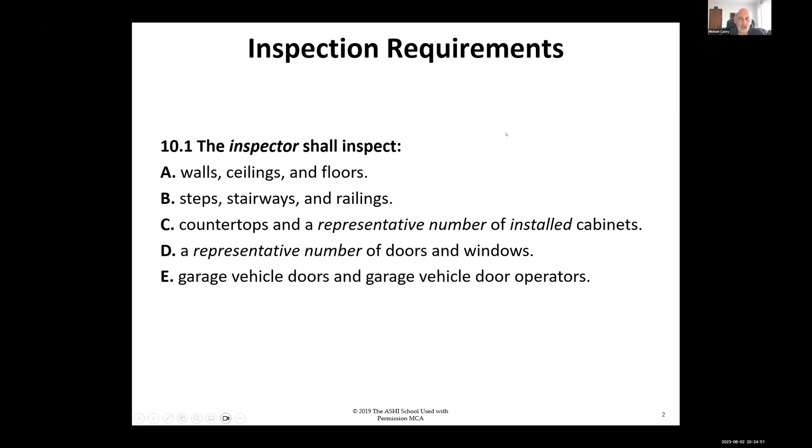So then, of course, we have the exceptions, things that we are not required to inspect. But what are we looking for? Well, basically things that aren't functioning properly, are significantly deficient, which could be stairways. And then we have this item 3, which always kind of scares me, where we have to look for things that are unsafe. So we almost have to kind of predict, well, what could happen here? What could happen on these stairs?

How could people fall? Well, we want to look close for conformity with minimum standards on stairways. And it's kind of tough because many of us do really old houses. I grew up in a real old house in Connecticut, built around 1850, and it had some really steep stairs,

and they certainly did not have rise and run like you would see required in modern homes. Then, of course, near end of service life, stairways can be at the end of their service life, especially bulkhead stairs in basements. You want to look at those close because many times they're pretty well rotted out, and you find out that they're defective when the plumber stands on it with a water heater on a hand truck. So look closely at those.

Then, of course, we have to describe required systems or components. All right, so let's talk about interior stairs and landings. Now, I know I've specified this as interior stairs and landings, and that's more to limit this discussion because we only have maybe a little bit less than an hour.

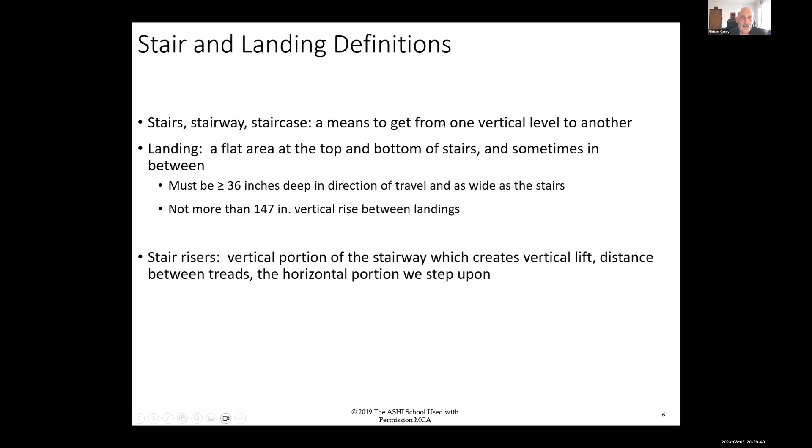Stair risers are the vertical portion of the stairway that creates the lift, and it's the distance between the treads, or the horizontal portion that we step on—that's the tread. So the rise is the vertical piece in between. We'll get to what all those do here in just a second.

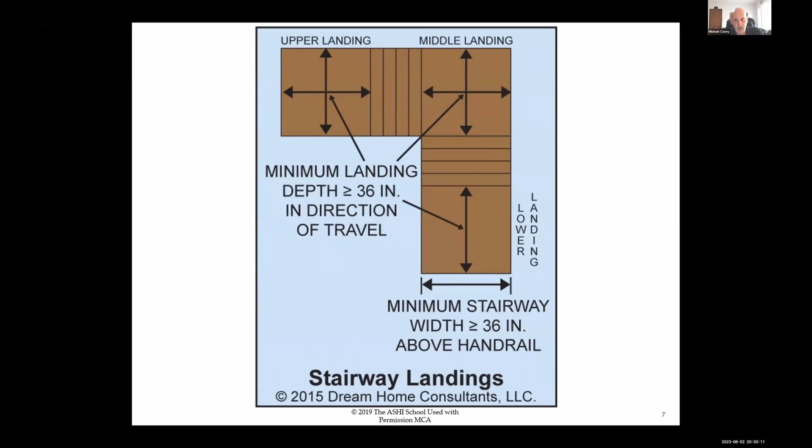So landings should be 36 inches wide and 36 inches deep. Pretty much that's going to be the standard. Now, there are some exceptions—you can have some angles in them, which we'll look at a picture of here in just a couple of minutes. What really matters is the width at the travel location, or the area of travel. We'll see what that is here in just a second.

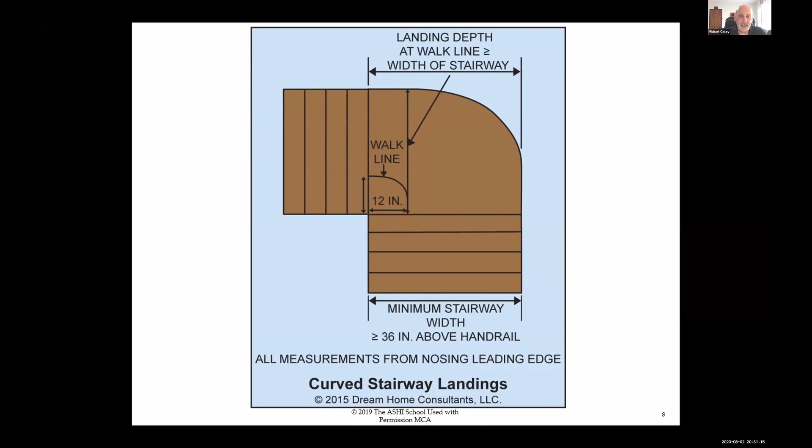So a flight of stairs, if you have a landing, is the stairs between the 2 landings—you may have 2 flights of stairs if there's an intermediate landing. The treads, or the steps, are the horizontal part that we stand on. Winders are going to be narrower at one end than the other, and usually they're used to change direction of the stairway. There's some minimum depths on those we'll look at in a second.

Now, regarding measuring tread depth, in the definition in the IBC, the tread depth is measured horizontally—the depth where you put your foot—between the vertical planes of the foremost projection of the adjacent treads. That means from the end of the nosing, vertically down, and at a right angle to the tread's leading edge. So the depth of the tread, if you've got a 1-inch nosing, that tread needs to be basically 11 inches if you measure it all the way to the piece of wood on the back at the riser, because it should be measured from the nosing. We'll show you some pictures of this in just a second.

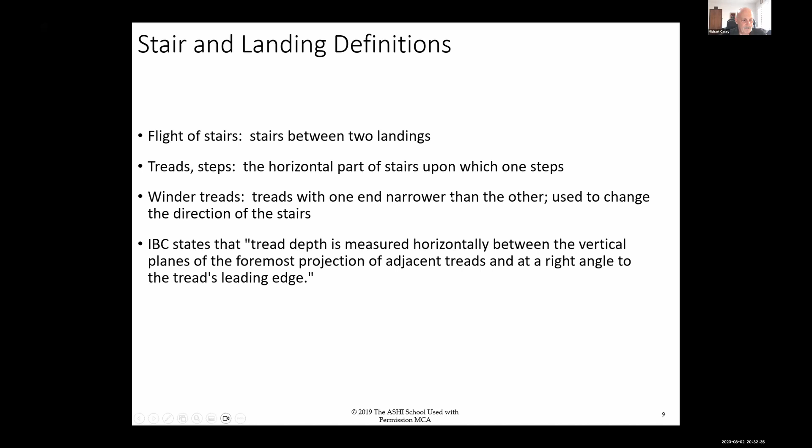And most of the time where we see them screwed up is going to be at the top one or the first one, because people change floor coverings, and that's what screws up the risers. Other times they're just built bad and they're all different, but usually what I see in the field is we've got a problem at the first riser or at the top riser, or both of them, because floor coverings were changed. The finished height of the floor is now different, which caused a problem there.

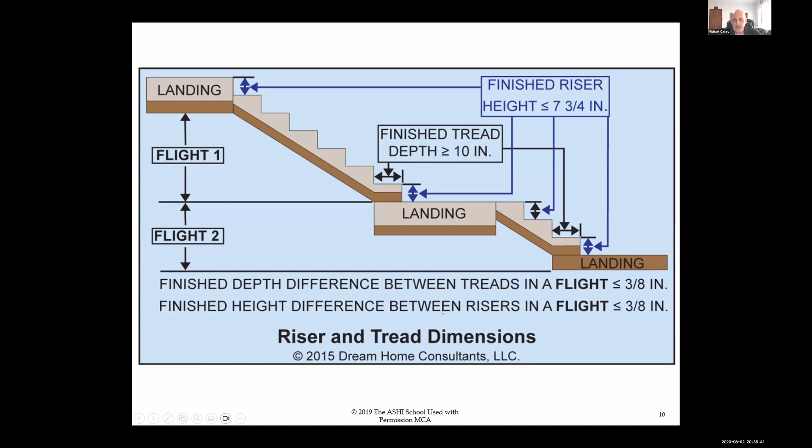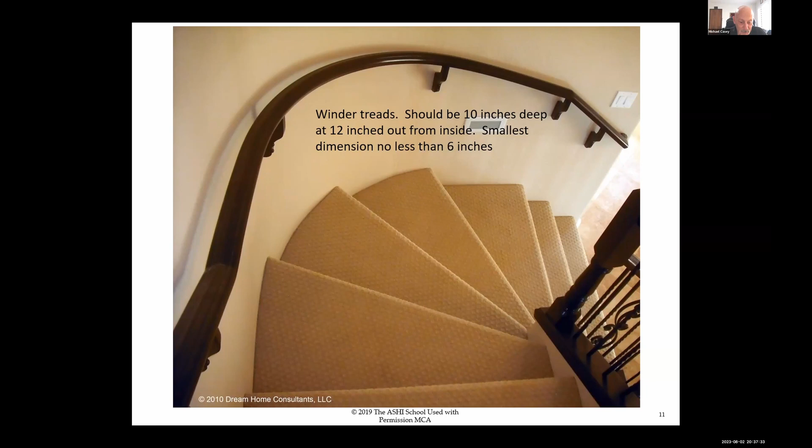Okay, so the risers are the vertical part of the stairs, and they can be open or closed. Now, we all know that when they're open, there shouldn't be any opening more than 4 inches when you get to be 30 inches or more above the floor below. So open risers, if you see them on older houses where they're open, they could be sometimes 6, 7 inches open. Those are a potential hazard, especially to children and pets. So we recommend that they be closed.

And then the nosing is the projection of a tread beyond the closed riser. Typically, you don't have a nosing when they're open riser treads. And then the stringers, those are the components that support the treads. So I'm sure everybody on this call knows what they are, but I just want to make sure. We'll just go through them quick.

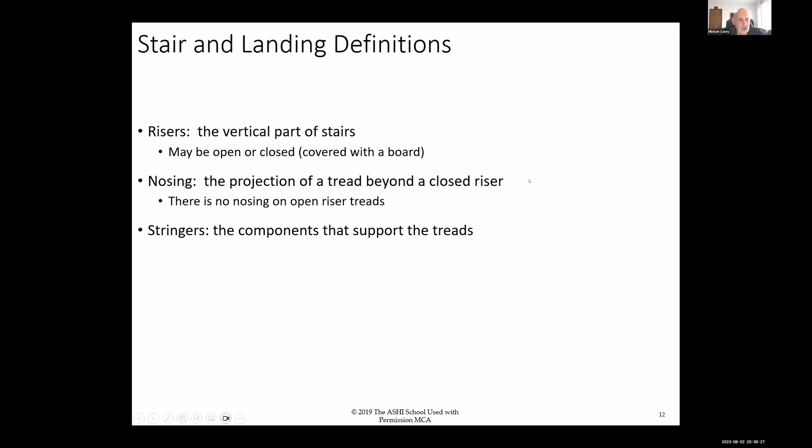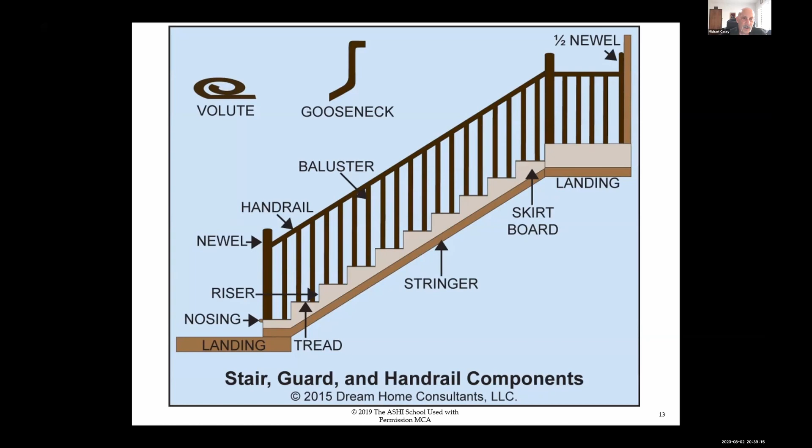Now, a lot of things have changed over time, especially headroom in stairs. Gosh, it used to be 6'4", then it went to 6'6". Now it's 6'8". Back when we used the uniform building code, your treads could be 9 inches with 8-inch rise. Of course, back pre about 1915 or 1920, there wasn't any code, and people just built whatever. And then we used to be able to have 30-inch wide stairways. Imagine carrying furniture up. So a lot of things change over time.

And of course, failure to comply with modern standards isn't a defect. However, I still note what the modern standard is, and I recommend upgrading because people fall on stairs. And you know what? If I don't say anything about it being an old stairway and not compliant with modern standards, I'm probably going to have a bit of a problem. So I always recommend upgrading to modern, safer standards. I doubt any client has ever fixed it, but I told them. So that's the main thing, I tell them what's up in the report.

So maximum riser height, 7 3/4. Remember, your minimum is 4. And taller risers, you're going to find a lot in older homes. And we want to make sure that there's no openings larger than 4 inches in open risers, anything a kid could fall through. And then tread depth should be at least 10 inches, and we need to measure that from the adjacent tread leading edge, which is the nosing. And narrow treads can be a hazard because you don't get a full area to plant your foot on.

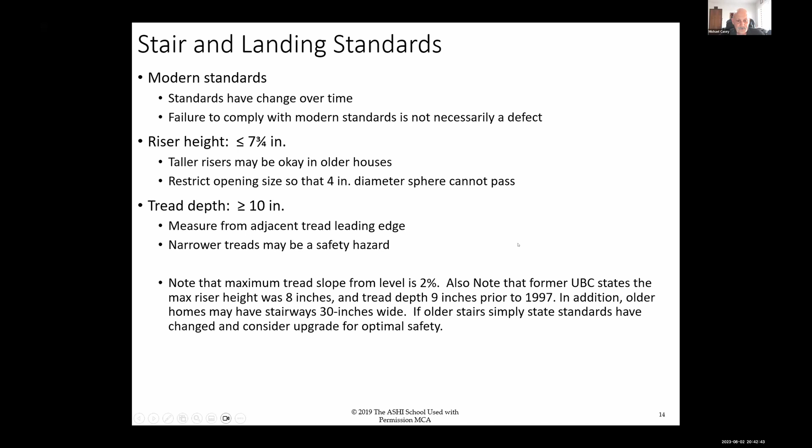Okay. And then winders, we kind of touched on this before. You've got to make at least 10 inches deep in the tread, at least 12 inches into the stairway. And then that minimum 6 inches depth anywhere. So at the small end it has to be minimum 6 inches of tread, not 3, not 4. It needs to be 6 inches. And the 3/8 differential, we talked about that.

And then nosings. I see a lot of nosings that are totally screwed up. So it should be 3/4 of an inch to 1 1/4 inches. That's it in a flight of stairs. So that's what the nosing can be. I looked at one recently, the nosing was 2 1/4 inches. And the treads effectively, because of that, were about, I think, 9 and 9.5 inches or so. So it really screwed up the stairs.

And then the difference in nosing depth. How many of you have ever measured this? The difference in nosing depth should not be greater than 3/8 of an inch between the top and bottom landings, meaning in a stairway. So that 3/8 applies also to the nosings. And you'd be surprised if you measure the nosing, the difference that you can find sometimes, especially if people have changed the floor covering.

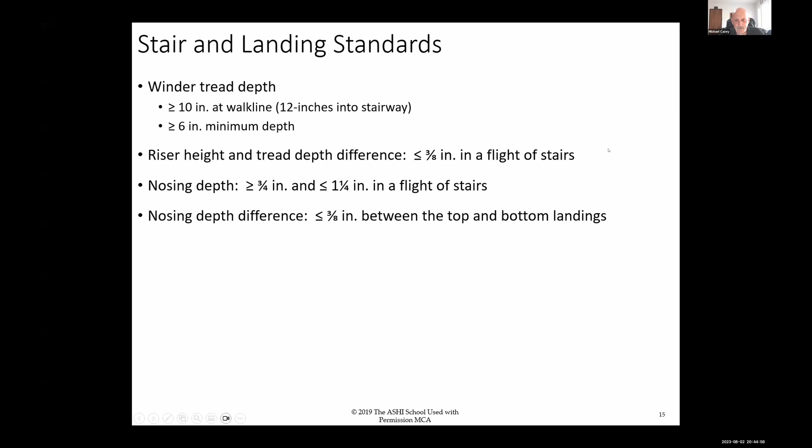Those are hazardous. And I've seen those quite a bit where there's laminate flooring installed at the stair treads, and whatever they cover the nosing with is like an L type piece, but it's got a bit of a rise to it, and it's very unusual because it changes the profile and it causes people to trip. So be careful when you see those.

Okay, so winder treads, let's just make sure we've got this clarified. At the small end here, minimum 6 inches, and you need to make tread depth of 10 by the time you get 12 inches in, right here. So that's it. And I think there's pictures. Yeah, there's pictures in the code check book here too. So make sure you have that.

And if you need to refresh your memory, sometimes the stairway looks kind of odd and you have to refresh your memory. So go back out to the inspection wagon and take a look at your code check book or whatever reference you use. Because you don't have to try and remember all this stuff, especially stairways. It's a heck of a lot of numbers to remember.

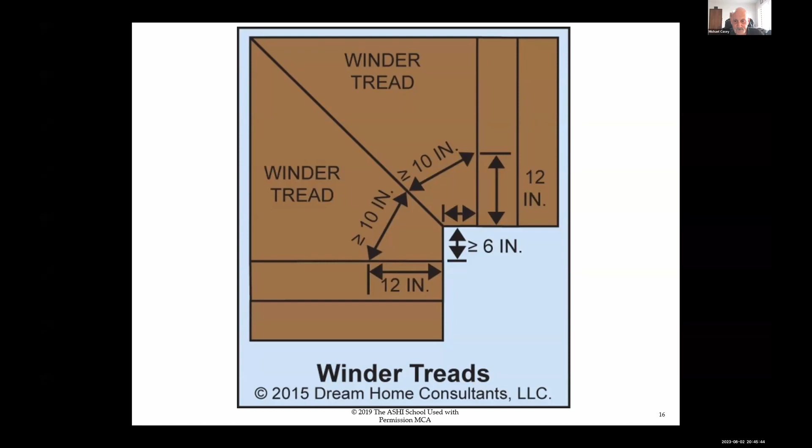Okay, so headroom, modern requirement, 6'8". Now, it used to be 6'6", then it was 6'4" before that. I see a lot of stairways, especially those ones on the capes where you're going up to the attic, that finished room that's upstairs, and you have to bend your head like this to get up there. Those are obviously less than 6 feet. So report that. It's incorrect.

And what are you gonna do? How are you gonna fix it? You're gonna poke a hole, do a dormer in the roof to give you enough headroom on the stairway. So I guess you could. I mean, that's one way to get around it and fix it. So I just note the deficiency. Usually it's pretty obvious, but even though it's obvious, I'm still gonna note it and recommend that people use caution when using the stairway. I mean, what else? Recommend correction for optimal safety. And what else can you do?

Okay, headroom for spiral stairs, a little bit different. 78 inches, so 6'6" for spiral stairs. And we'll look at some examples of those in just a minute. And then, of course, minimum stairway width is 36 inches, and this is above the handrail, by the way.

I think it's 27 below, but I could be wrong. I have to check that. Stairway lighting is important. I'm working currently on a claim where somebody fell on a stair because of, they're blaming lack of lighting, and actually it's the truth. There wasn't any lighting, or it wasn't appropriate.

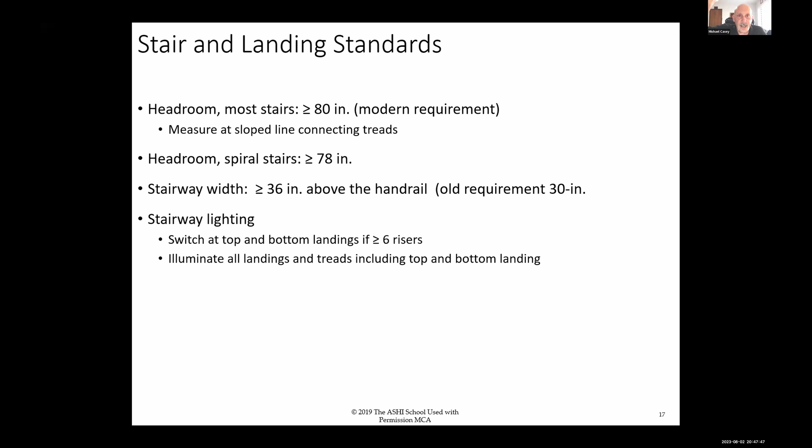So there should be a switch at the top and bottom landings if there's 6 or more risers. And it's really hard to tell if the lighting is correct when we're doing an inspection. Usually it's during the day, at least the ones I do. So the lighting should illuminate all the landings and all the treads. You should be able to see. So I just look up and make sure there's a light above the stairs or close by that's going to illuminate the treads.

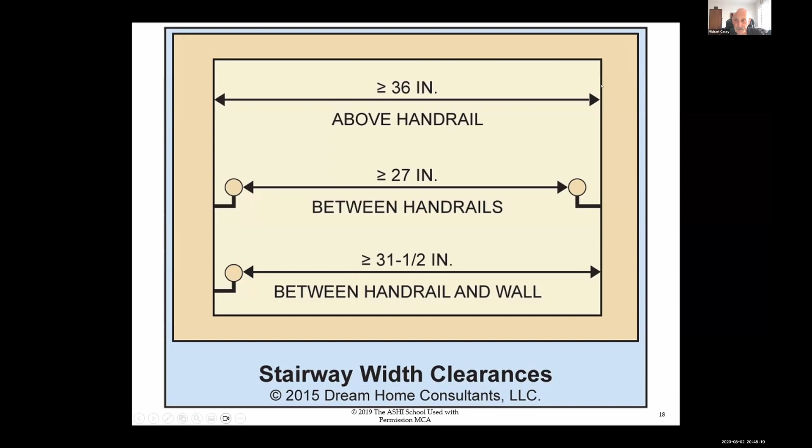Okay, so here's our minimum distances. The width of the stairway, 36 inches above the handrail. It's 27 inches between handrails if there's 2 of them, and then 31.5 inches between the handrail and a wall. So these are our distances. So a lot of numbers to remember. So that's why it's good to have kind of a cheat sheet or code check or some kind of book you can use to take a look at it, because it is quite a few numbers.

Okay, stair stringers, when you can see them, because a lot of times we can't see them because they're covered with drywall, which is what they should be covered with if there's storage space under stairways. It needs to be covered with drywall. So the stringers, the throat depth should be at least 5 inches or so, and that's a recommended number. It's not a required number. If I see anything that's 3 or 4 inches or less, that's definitely reportable because that's a lot of the meat gone from the material.

And then dimensional lumber stringers should be secured. It needs to be supported at the top and the bottom. It needs to be something holding it in place. So there's not really any prescriptive rules, but the plumb cut should be bearing fully, not a half an inch. I'll show you a picture of that. And the seat cut should be bearing, and it should be bearing on the long part, which is the heel, not the little toe part. So the deck stairway information actually could tell you a lot about these. It's pretty much the same.

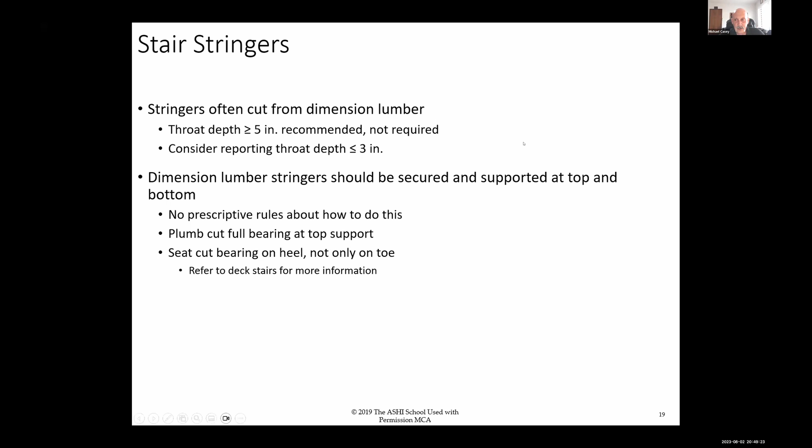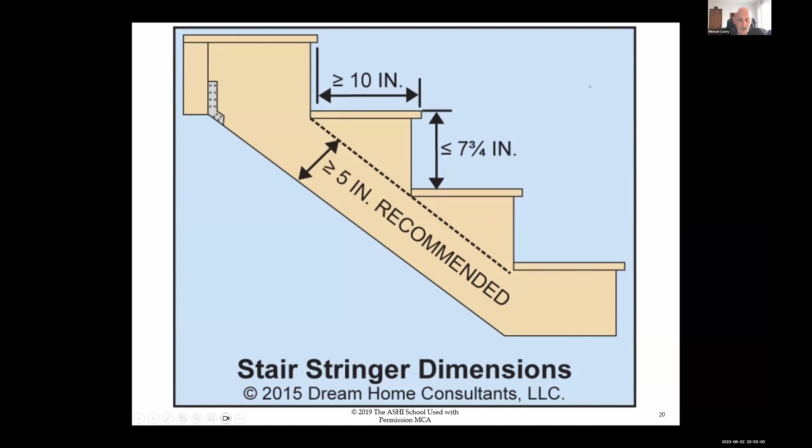So 5 inches here should be minimum. And remember, here's a good diagram showing us how to measure your tread depth. So we should be measuring from a vertical line from the end of the nosing down. That's our tread depth here. See right here? That should be our 10-inch minimum tread depth. So a lot of times they're wrong. A lot of times they're 10 inches full here, but the nosing is 1.5 inches. So that would be incorrect. That's not a proper way to measure your tread.

Now this one we can actually see the plumb cut at the top of the stairs, and you can see it's just kind of hanging there. There's a couple of shims installed, and I can't tell what's holding this up because there's material in the way, but it doesn't look good to me. So I'm going to recommend additional support, maybe some hangers, something here to hold this stairway. This is the top of the stairway, so it doesn't look like there's much holding it in place.

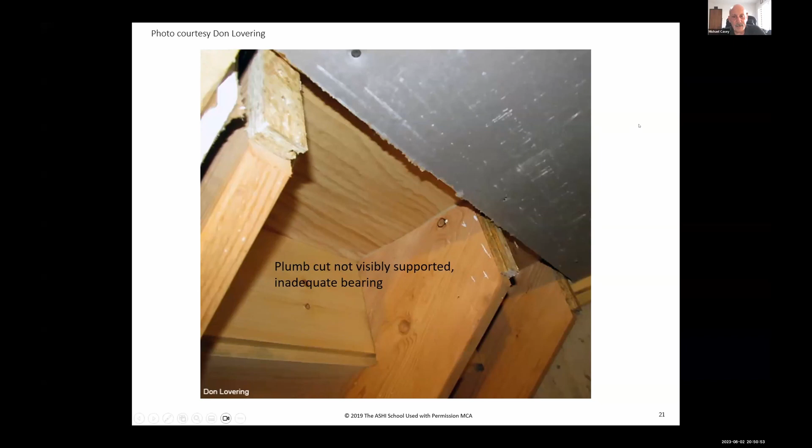I think stairways in newer homes are usually much better because typically the framers on site don't build stairways anymore. They order them from a stair company. That's all they do is build stairs, and they're pretty good at it. So most of the ones we see that are built by these specialty companies, they come out and measure and they build them and then drop them at the site. Those are usually pretty good, but they can screw them up too by not supporting them properly.

Okay, so spiral stairs. These are interesting. I typically see them maybe for a mezzanine, or I've seen them used to access a deck. So spiral stairs are kind of the ones that are not a whole lot of room and feel kind of dangerous going up and down. And they have their own rules.

Riser height, 9.5 inches is maximum. That's quite a tall riser. Tread depth, minimum 6 3/4 inches at the walk line, that's 12 inches from the small end. So really totally different. And the width, at least 26 inches at and below the handrail. These things are just their own total animal, and they can get screwed up too. Usually they're okay when you buy ones custom made by stair companies, a lot of times made out of ornamental iron. But I see people try to site build these things, and usually they'll screw them up.

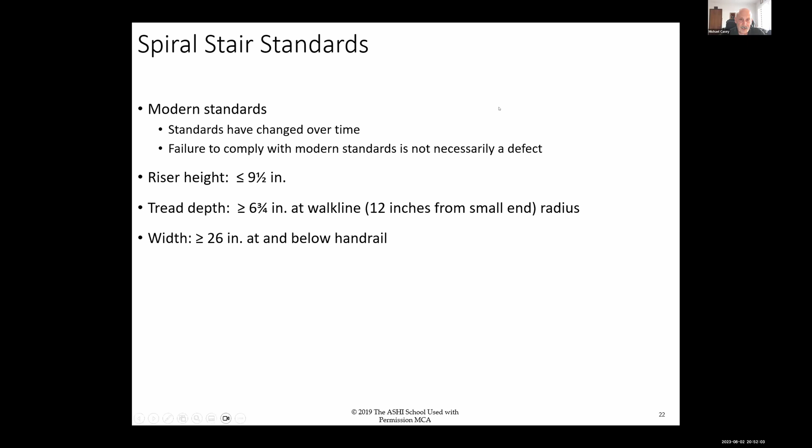Now this is a claim I worked on some years ago, 2019, where somebody fell. This is a spiral stairway that was site built. Remember, we're supposed to have 6 3/4 inches at the walk line, 12 inches from the inside corner. And we're at about 5.5 or so here, maybe a little more. We're definitely shy, a good inch shy of 6 3/4. Somebody fell down these stairs, and eventually it got settled, somebody got paid off. I was one of the experts, maybe for the insurance company or something, I don't remember. But I went and measured it, and I told them, it's wrong.

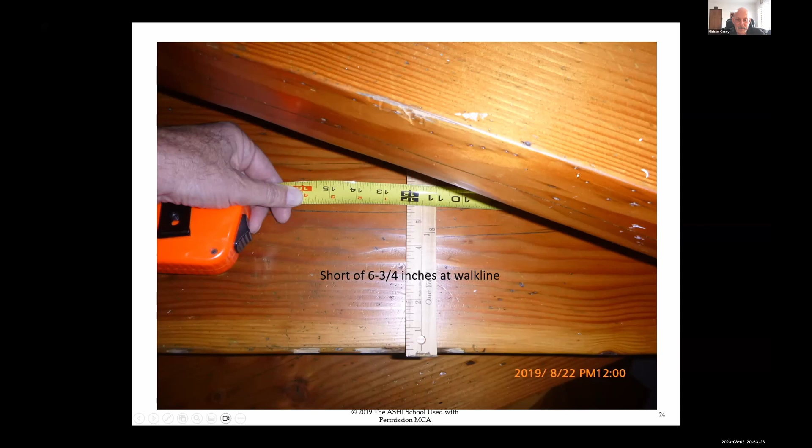So what else are you going to tell them? You've got to tell them the truth. So it was incorrectly built. We're going to see quite a few stairs with risers that are taller than current standard. It could be, if it's an older home, that the standards were different back then. If it's something newer, it could have been built wrong. But regardless, I'm pretty much going to report it. If it's an older house, I'll say the riser height is more than what we'd see in modern homes and consider upgrading for optimal safety. I know people out there are groaning about that, but that's what I do, just to make sure, give them the option. You could upgrade it, which basically means rebuild the stairs.

So I told you, tread depth smaller. We used to have 9-inch treads with the UBC, and I think the standard building code too, so 9-inch was pretty common. Now it's 10 inches, measured from the nosing. Usually it's because they're older stairs, or it could be if they're newer, later than 1997, which is when that code changed, then it could be something improperly built. So I recommend correction regardless, or consider upgrading, it's up to you as the inspector. But remember, it's stairways, people fall.

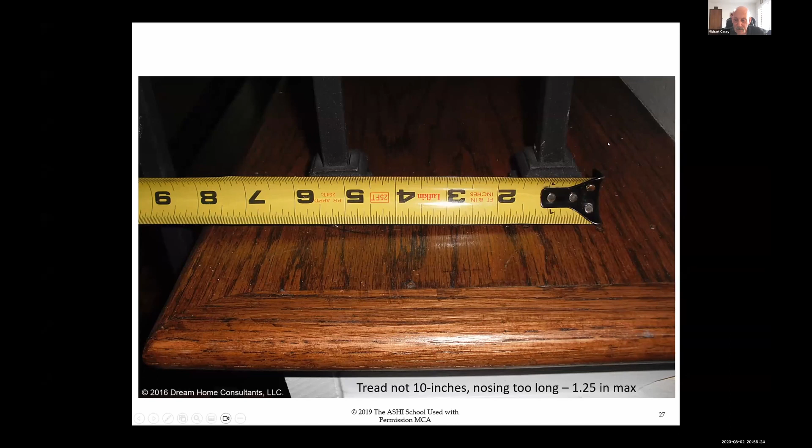And here it is. We're looking at a stairway where look at that nosing, it's hanging over about 2.5 inches or so, where 1.25 inches is the maximum overhang for a nosing. Remember, 3/4 inch to 1.25 inches. So this tread, if you measure from the nosing edge, you've only got about an 8-inch tread. It's incorrect, the tread should be at least 10 inches. The way to fix it is to reduce the nosing, the nosing is actually the problem, it's a defect because it's too long. This one, I think it might have been 2 3/4, way different than what it should have been. So we documented that it was incorrect and recommend correction. Are they going to do anything? Probably not, but we still want to tell them in the report.

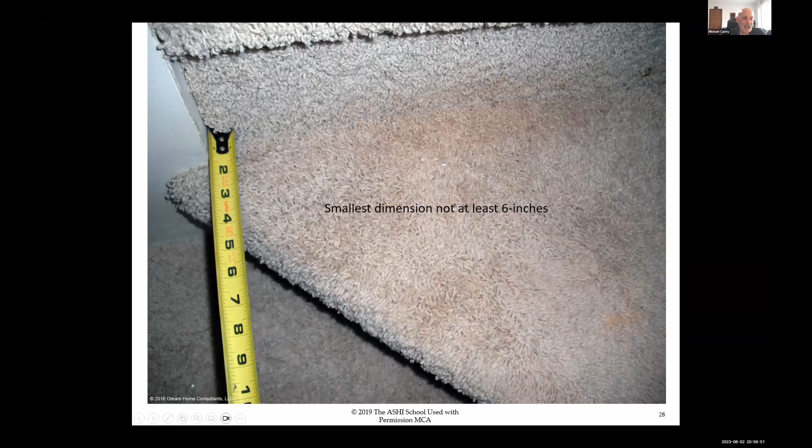Now here's a winder, and you can see we've got this small end here, should be what? 6 inches minimum, and this one is about 4. If we shove the end of the tape all the way into the carpet to get an accurate measurement, we got about 4 inches here. Of course, just about a point over here. So we're being nice, and we definitely don't have the 6 inches minimum at the end.

Now this one, nosings, that's important. The nosing should comply with standard. It's something that you can drag your foot on. It could make you trip up if the nosings are too long. If something has covered them, like that laminate flooring stuff where they put that cover over the nosing, that transition piece tends to be loose, and it's a different profile and height, and I find that it's pretty easy to catch my foot on that.

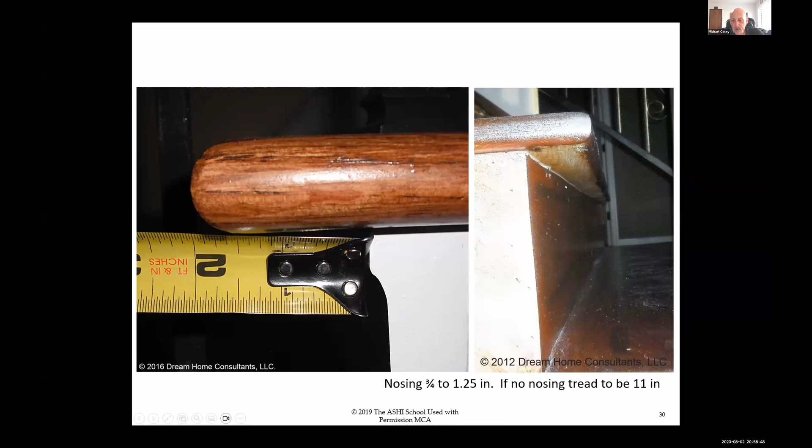So that's hazardous. There's a reason why we have these minimum and maximum measurements for nosing, because they've done testing, and we know how people get into a residence as you go up the stairs, and people fall when the measurements are different from what we're seeing here. So that's why it should be compliant.

So, we don't want to get blamed for people falling down the stairs. So if it's different than current standard, I'm going to note it because it's a potential trip hazard, and I'm going to recommend correction. So, we see a lot of stairs that are poorly built, and this includes, and you guys are going to see a lot of these, basement stairs. They're freaking awful. I've gone up and down a heck of a lot of them in older homes. Basement stairs, bulkhead stairs, people think that different rules apply.

Bulkhead stairs, gosh, I don't recall ever seeing them with a handrail. Going out the Bilco doors, there's no handrail, and there should be a handrail there. That's a stairway. The code doesn't differentiate because it's in the basement. I don't care where the stairway is. It should comply with these rules.

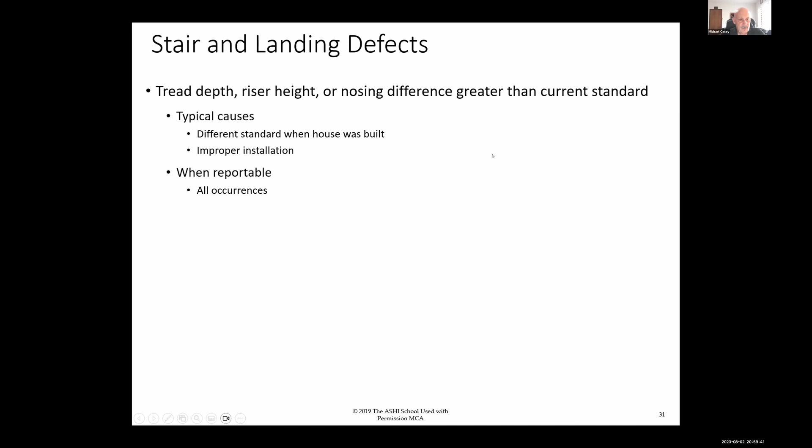And what happened was they changed the floor covering, and they changed it in every single apartment. There's like 60 of them, and they're all wrong. So they're probably never going to fix it. And the difference is a good inch in this first riser compared to the other one. So I didn't even need the tape measure to figure it out. Obviously, you can feel it. I could see it walking in the front door, the difference.

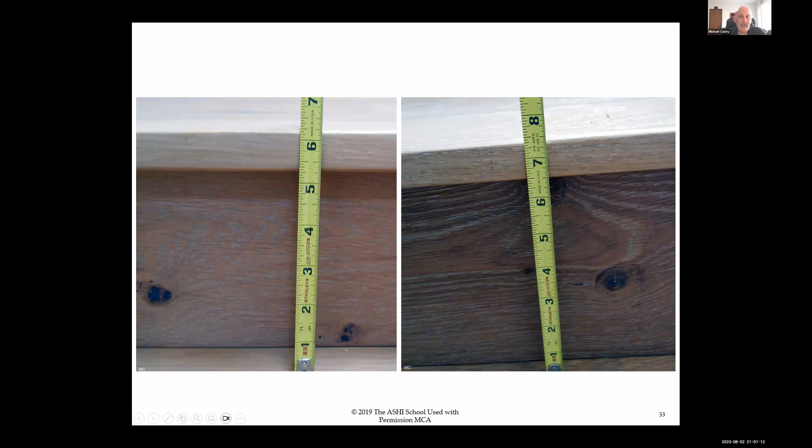So that's a trip hazard. And now they've created it in every single apartment in the whole project. So, unfortunately, it should be fixed. I'm going to recommend it. They're not going to do anything, but I'm going to tell them about it.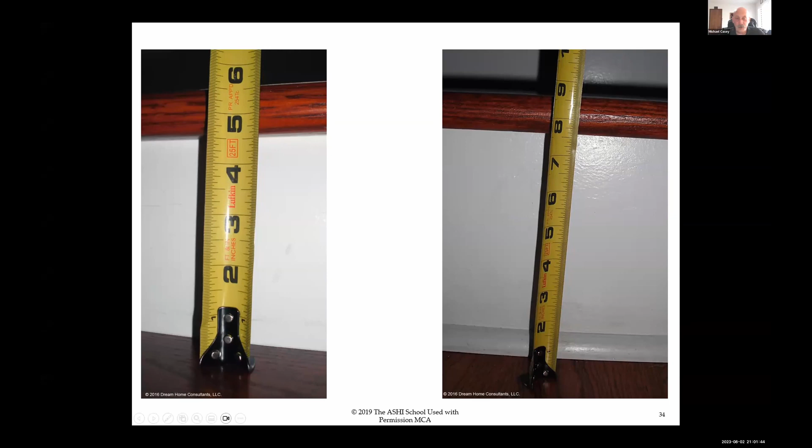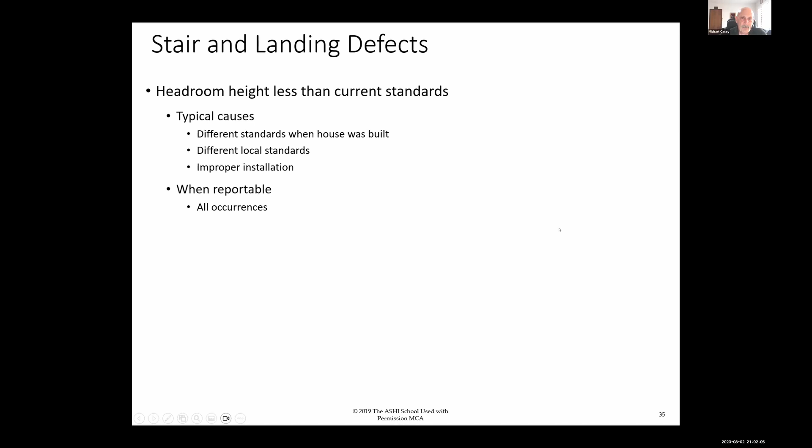Headroom, if it's less than 6'8", I'm certainly going to say something about it. Although if it's like 6'6", I'll just say it's less than what modern standards are. Caution in this area, that's about it. I probably won't recommend correction.

And this is how you measure it. It's an imaginary line that's kind of tangent to the nosing, or just take your tape measure and measure from the nosing up to the ceiling. Usually where it's going to be screwed up is right here or at the top of the stairs. Now, if you have to move your head to go up or down the stairs, obviously it's way lower than it should be.

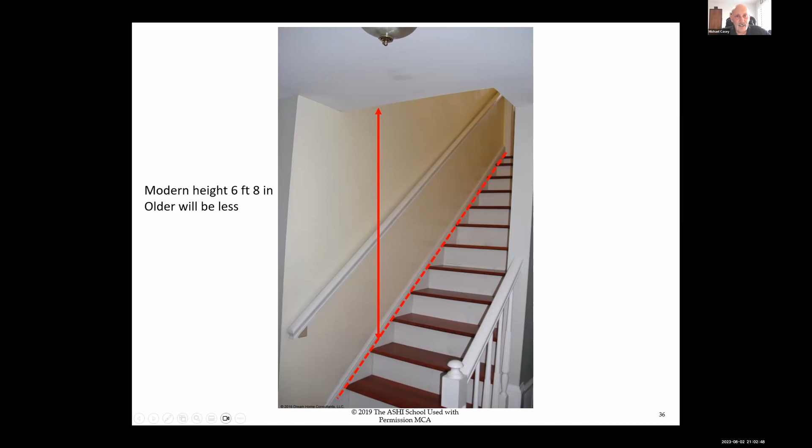I can't remember ceiling height ever being less than 6'4". So that's definitely way low if you have to move your head. And a lot of times that's at the basement stairs too. We have the sign there that says, or it's a picture of a duck. It's kind of funny, but still, you shouldn't have to hit your head going down in the basement stairs.

Okay, so width or landing depth less than current standard, once again I'm going to recommend that be corrected. Now, there's a different standard if it was a 30-inch wide stairway. If you're looking at a home that's 50 years old where it was a 30-inch stairway, obviously that doesn't have to be 36 inches. So I would just comment that the stairway appears to have been constructed under older standards that allowed the 30-inch width, and it could be problematic with bringing furniture up and down the stairs and so on, because it's pretty small. If you haven't walked up and down a 30-inch stairway lately, that's a big difference from a 3-foot.

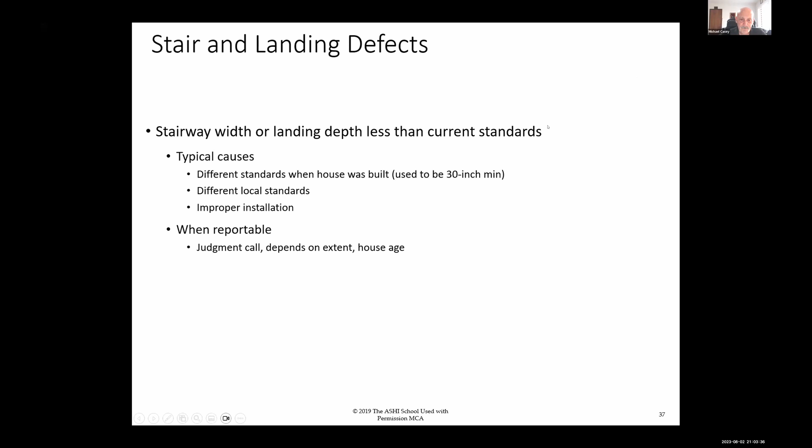So curved or angled stair or landings, which we talked about a little bit earlier. You can see this one is kind of a neo-angle type of landing. So this one's an asymmetrical landing, and it could be okay, assuming that this is the walk line here, which I would think it is.

And we need to get 12 inches, okay? Has to be 36 inches deep. Now, if the handrail was over here on the right side, that would be considered the walk line, and it would not be okay because you don't have 36 inches of depth for that 12 inches. Everybody see it? So here we've got full depth, over here we don't. So as long as the handrail is over here, that's the walk line, and that would be okay.

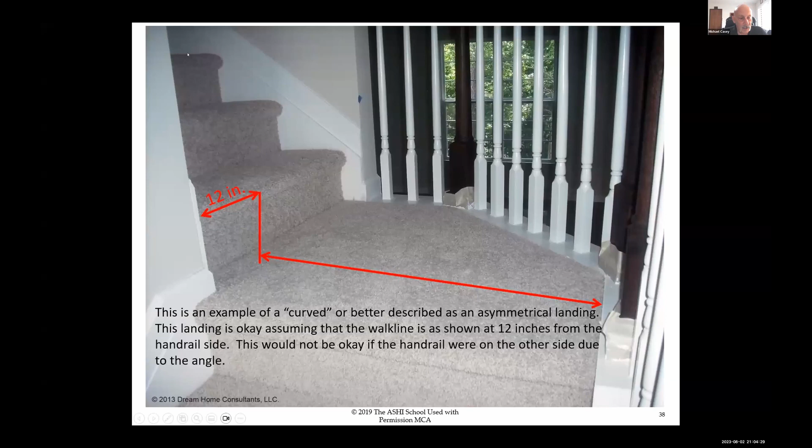Here's another one. Now this would not be okay. Here's the walk line, this is the handrail to the left. And you can see here that that's definitely less than 36 inches. It's going to be awful difficult getting stuff up and down these stairs too, the way that they made this, because you've got this angle, and that's not going to be 36 inches there. I think it was significantly less. I think this is 36 right here to the apex of this joint, but it wasn't here. So that's a mistake, 35. That should be 36, I'm sure you guys know that.

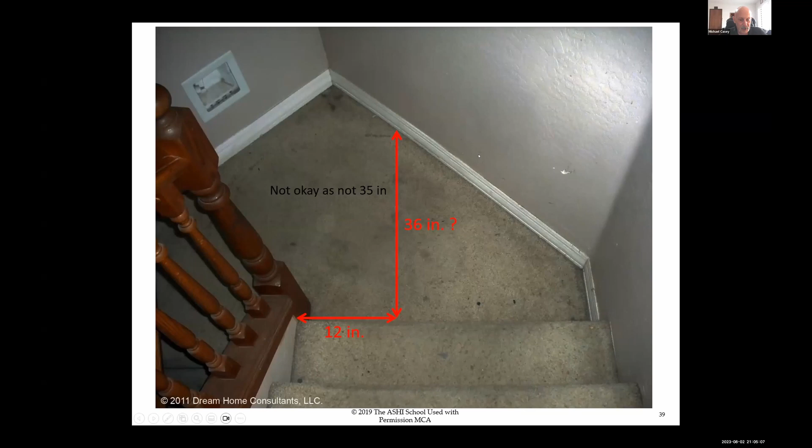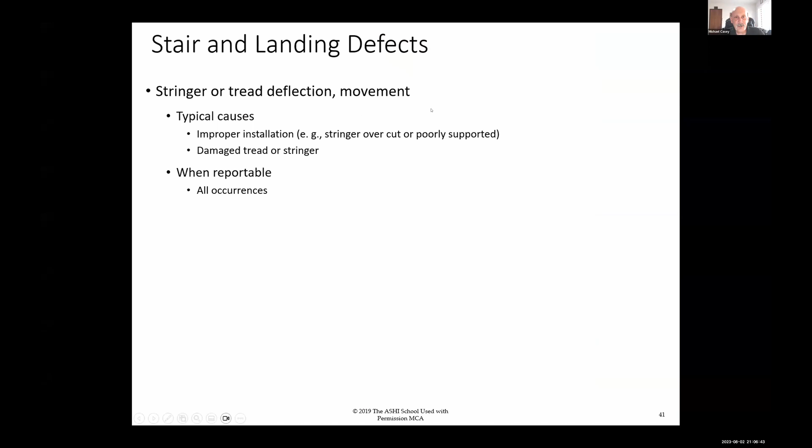How about tread deflection or movement? If you feel things moving underfoot when you're going up and down the stairs, something's wrong. And then illumination, improper switch location, that's a problem.

If there's 6 or more risers, there should be a switch at both levels, so it should be a 3-way switch. And there should be enough lighting so you could see the stairs, the landings, and everything from both positions, up or down.

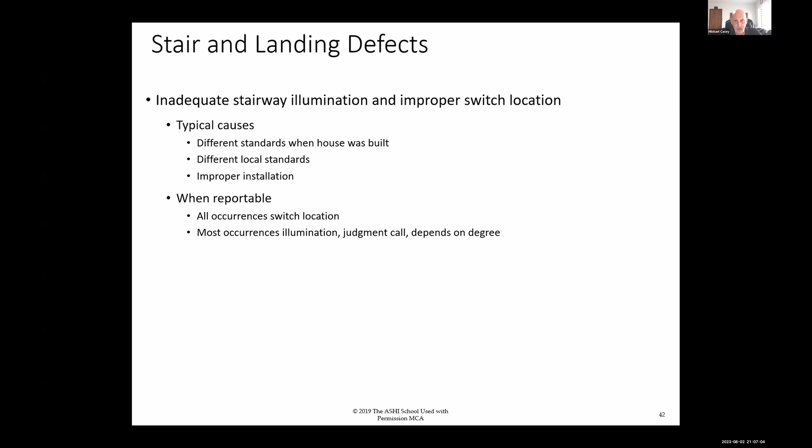So this one was kind of odd. And I know the camera's a little bit tilted, sorry. But we've got right up here a light fixture, and there's another one up here. Now the switch that turns on what's supposed to be the stairway lighting only turned on this light up here at the second floor hallway. It did not turn this other light on. This light above the door was turned on by a different switch.

So you weren't able to operate it as a 3-way. You couldn't turn this one off from upstairs. So kind of odd - if you got a light right above the door that's part of the stairway illumination. So I just said it was inadequate lighting and improper switching, because you need to be able to control all the stairway light.

I don't care if you have 5 or 10 lights, it needs to be controlled by a 3-way switch accessible from the top of the stairway and also the bottom of the stairway. So it was incorrect. You might want to spend a little time looking at this, because every once in a while it's kind of screwy.

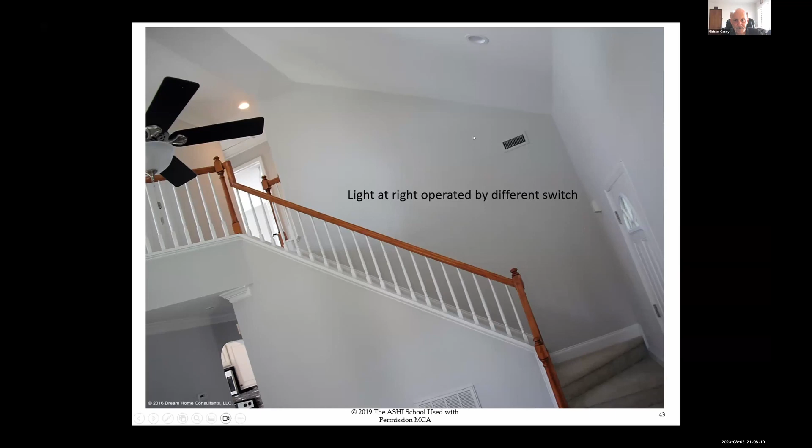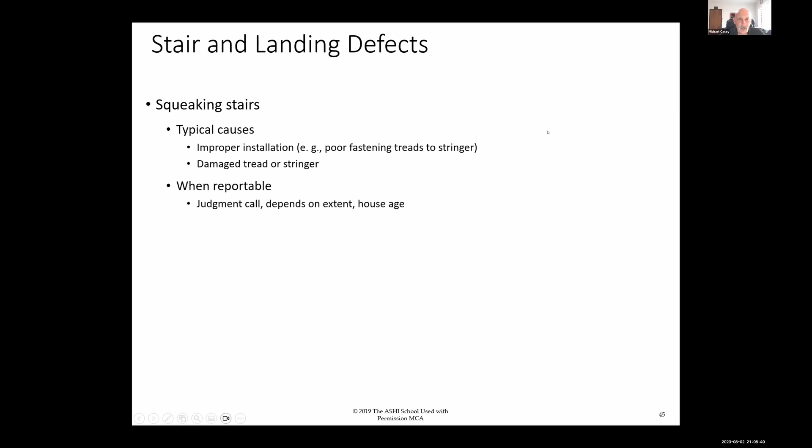All right, handrails and guards. So you need to have a handrail on any stairway with 4 or more risers. There should be a handrail, and you only need one, it only has to be on one side. It needs to be 34 to 38 inches above the tread leading edge or the floor. It must be continuous over the entire flight of stairs from the top riser to above the last tread, the lower riser.

And it needs to terminate in a return to the wall at a newel post or a volute, and I'll show you what that looks like in just a minute. There's specific sizing and shapes, and the main thing is it needs to be graspable. You need to be able to get your hand around it and hold on if you feel like you're going to fall, or if you're unstable. Heck, I could be unstable if I'm quite tired going up the stairs, and it's nice to have something to hold on to.

Then the clearance to the wall - this is blown quite a bit. The space where you put your fingers between the end of the handrail and the wall needs to be minimum 1.5 inches. And if you're rubbing your knuckles on the wall or something, then that's wrong, there's not enough room there.

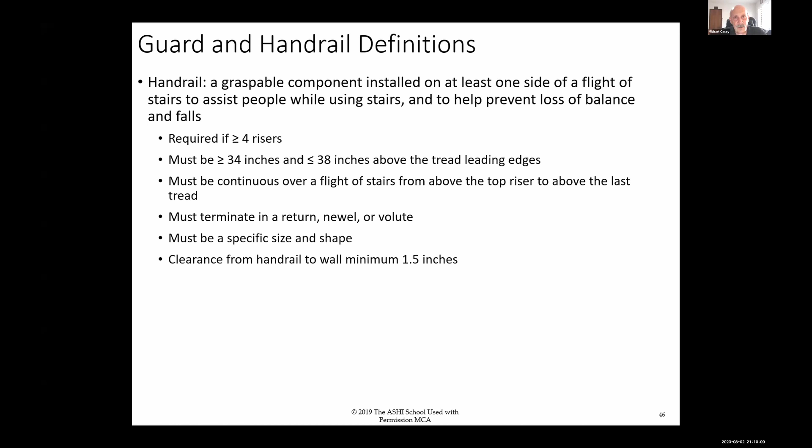So this is a return to the wall. Here's a circular handrail, dimensions should be 1.25 inches to 2 inches. You can see here square, and then we have the handrail with finger recess on both sides. That's a key thing with these handrails, finger recess on both sides. And here's your dimensions - you don't have to memorize them. I would say if you can't get your hand around it and grab it, it's probably wrong, and then you might want to go and look at your book.

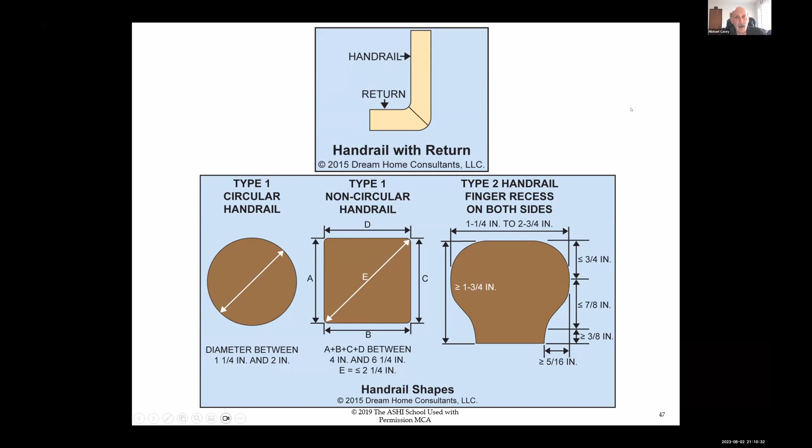So here's a termination volute. And it looks like this handrail on the other side doesn't return to the wall.

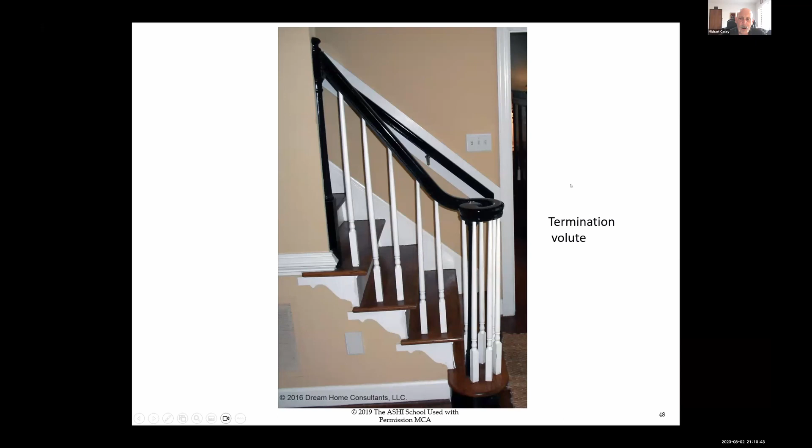Okay, and then the open sides of stairways. Anything that's more than 30 inches above the surface below needs to have a guard. Many times the handrail will act as the guard so that people don't fall off the edge of the stairs, so that works. It must be 36 inches, unless it's a handrail.

It could be 34 to 38, but guards are typically installed at the upper level, if you've got an open hallway kind of a thing, walkway, minimum 36 inches above the adjacent walking surface, unless you live in California. People here are taller, I guess, or more top heavy, and you need to have minimum 42-inch height, and it must resist a 200-pound concentrated load.

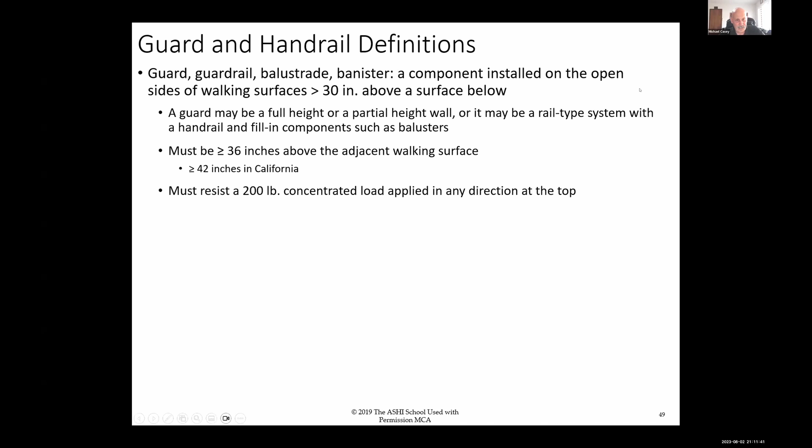I don't recommend that you shove against it with 200 pounds of force because you might fall over. I kind of give them a little bit of a shake with my hand and make sure it's solid, and that works for me. The infill components are supposed to resist a 50-pound load. I pretty much don't test them unless it looks weird, but you don't want to break it either. People will blame you for that.

If there's any glazing in the guard, it also must be safety glazing. I'm not going to be testing that for the 50-pound load because it'll probably break. And then the guard infill, like balusters, should not allow the passage of a 4-inch sphere. So basically they need to be just a skosh less than 4 inches apart. And we'll look at a couple of those.

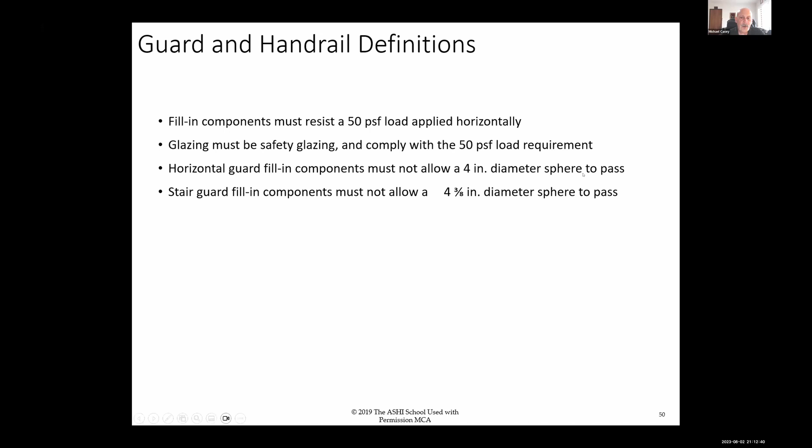And then stair guards are different. They must not allow passage of a 4 3/8 inch sphere. That changed not too long ago because it gives you more uniform spacing when you're installing the balusters. So that 4 3/8 allows for just a better design and it looks better.

So here's a different schematic. You can see number 5 is that 4 3/8 inch, and this triangular space here between the bottom of the guard, which is a handrail, and the stair tread, that can be maximum 6 inches gap there. And then of course up here where it becomes a guard, that's 4 inches. So only in the stairway is it allowed to be a 4 3/8 inch sphere. So a bunch of information here.

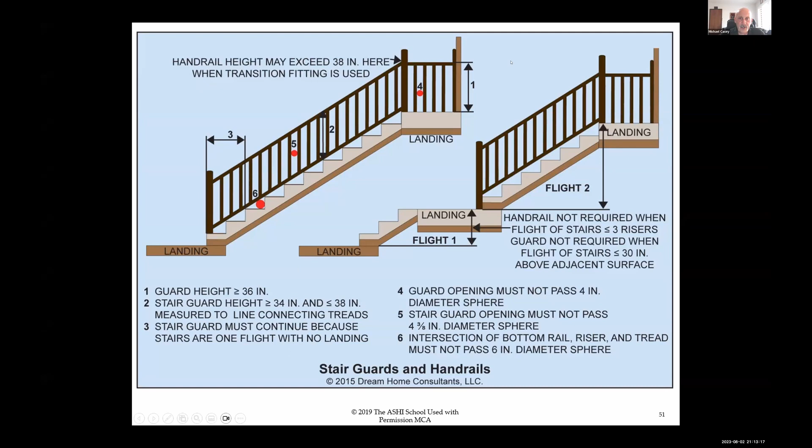Okay, while we're on this subject, we put in a slide here about safety glass because windows near stairways can be a problem as well. You could poke your hand, your arm or your body through it while you're trying to grab a handrail, or maybe you're falling down the stairs. So it all depends upon distance from the tread to the window. Anything within 36 inches of the nosing, this line drawn tangent to the nosing, should be safety glass. Anything within 36 inches of the intermediate landing, safety glass.

Now, if it's within 5 feet and within 36 inches of the floor at the lower landing here, it needs to be safety glass. More than 5 feet away, doesn't have to be safety. And the one up here at the top could be any height, doesn't require safety glass. So safety glass at the intermediate landing, if it's close to the treads, or if it's within 5 feet of the bottom landing, because that's where you're going to end up when you're falling down the stairs. That's the reason why.

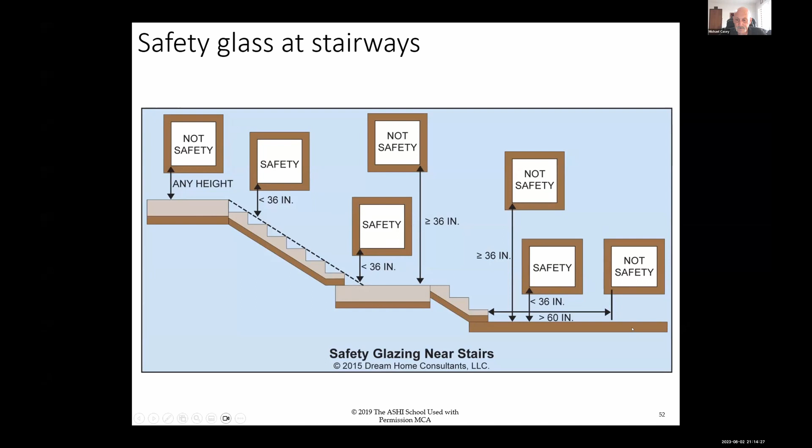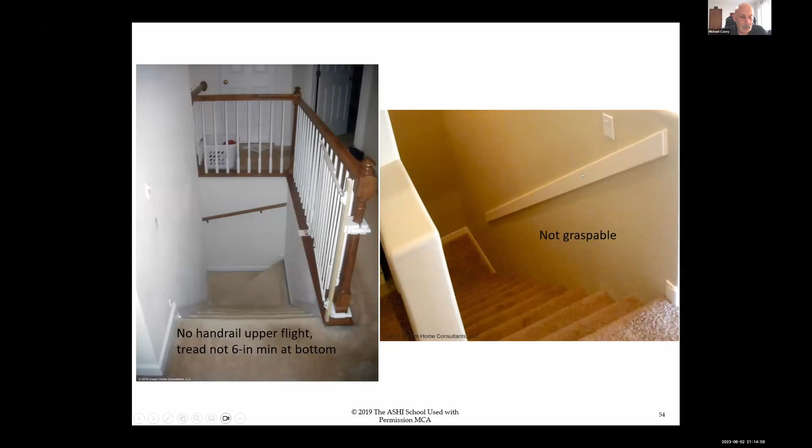Okay, so we're going to see a lot of handrails that are incorrect or missing, like this one here. And then we also have a problem with this winder, and that should be minimum 6 inches at the small end here. So that's incorrect. No handrail at the upper flight. This one here, that's a 2x6 installed on the wall, but it's not plowed out on both sides to give you some grippable surface. So a 2x4, 2x6, and especially on decks is where I see them, not a proper handrail. So it doesn't work. It's not considered to be grippable.

Here we have rather steep stairways, both of these, and the handrail does not extend to the end of the bottom tread.

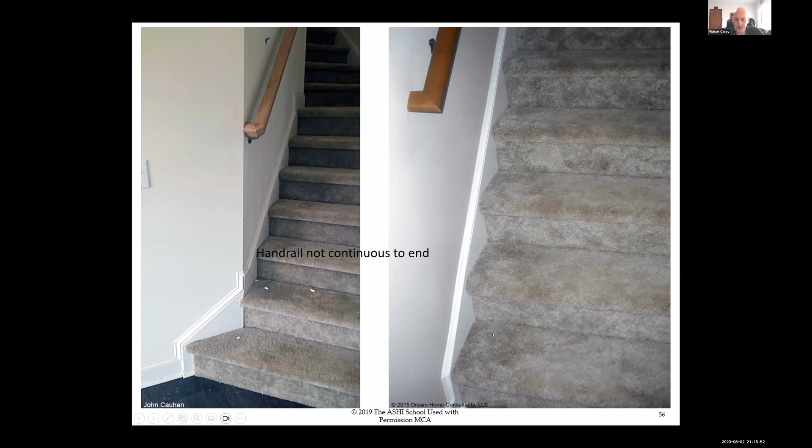You can see here, this one kind of twists around the corner just a little bit, but you can still make it work. Same over here. So we're missing 1, 2, 3, like 4 or 5 of the treads don't have a handrail. So definitely incorrect. Here's another one. Handrail not continuous, should be all the way down.

Plus we have issues with the winders. Not 6 inches minimum at the end, not 10 inches deep at the walk line. So a lot of times these, at first glance, it might look okay, but it's not. Make sure you look at these winders. You got to have minimum 6 and minimum 10 inches at 12 inches in from the small corner.

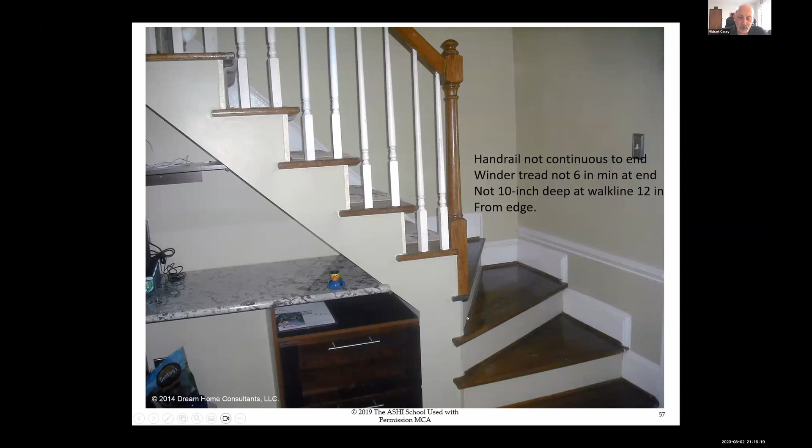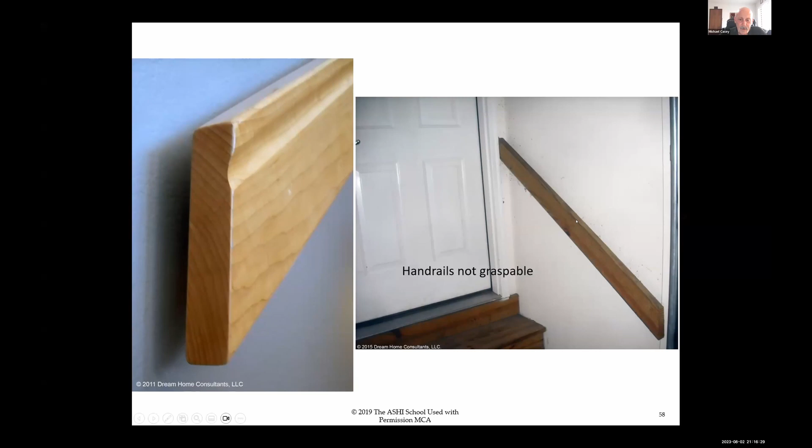Another improper handrail. This one is not graspable. This one, 2x6, once again, not graspable. And then guards, not complying with current standards. I recommend upgrade for increased safety.

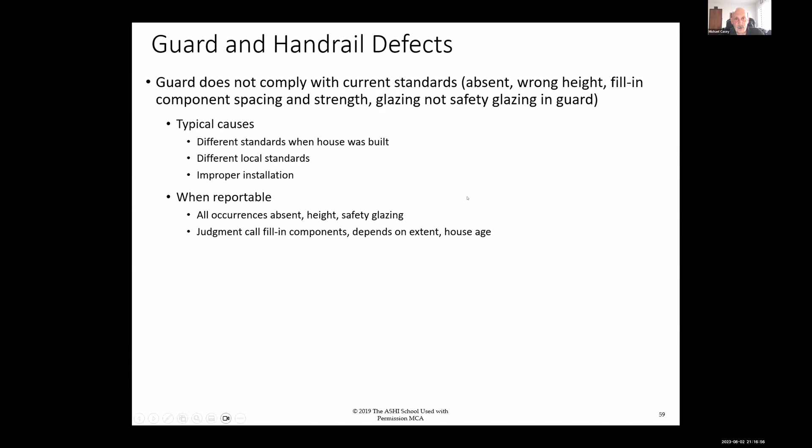And we see a lot of them here in California, where most of my inspections are, because we had the rules change from 36 to 42 inches height a long time ago. So a lot of us are recommending for optimal safety, consider upgrading the height of your guardrail. So probably most people don't do it, but we do recommend it.

And then spacing of the vertical members. You can see here, now this one is more of a ladder rail. And this, frankly, was a code violation back, I think, in the first IRC in 2000. This was a code violation, what they call a ladder rail, but then it got removed from the code. But the spacing is a problem here. Should be no more than 4 inches.

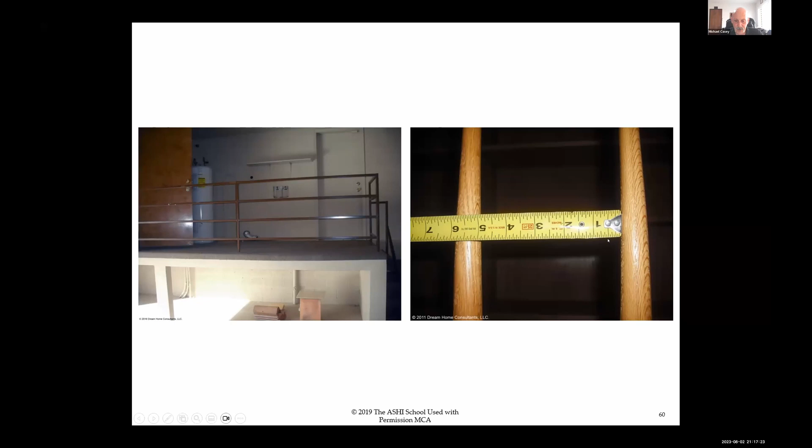Here's another one. You can see we've got 5-inch spacing. So very common defect. Here's the height. Now this wouldn't have complied even with the old rules. 31-inch high. Here's another one, 31-inch high guardrail. It came up to like mid-calf.

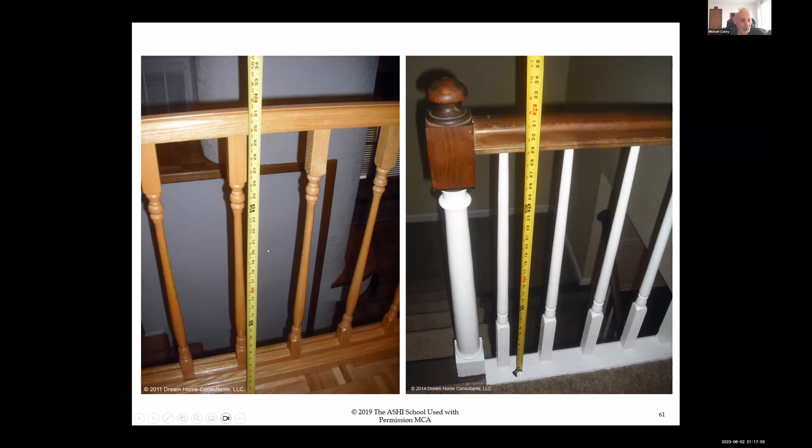So that's quite low. And everybody here on this call is top heavy, including me, and if you lean over this too far, you're going down. So 31 inches is definitely not high enough for a guard. So I recommend an upgrade. And this one here on the left, we had spacing of maybe 6 inches between the balusters.

So that's what I got for us tonight, and I'd love to open it up for questions. And hopefully this helps clarify some things. And let's see what we got. Go ahead, somebody I think has been taking the questions. It looks like we got about 40, so I'm happy to go through them.